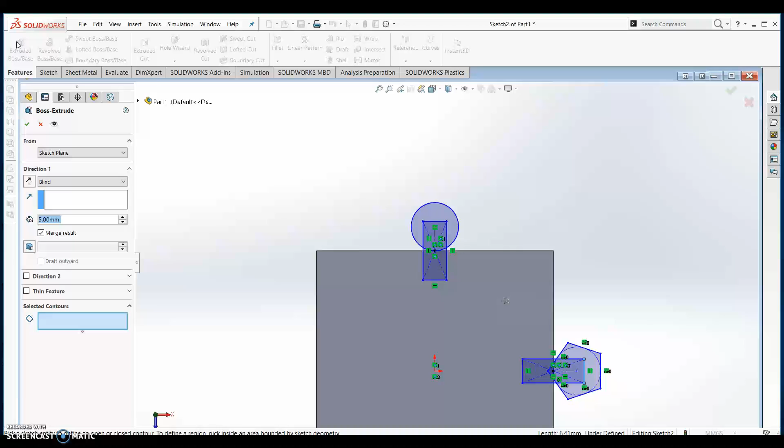With all of our shapes drawn, we are nearly ready to extrude. If we were to go directly to our Features menu and extrude at this point, we would find that each shape contained by a separate loop would need to be picked as its own entity. So it would take 4 separate sections to extrude this circle.

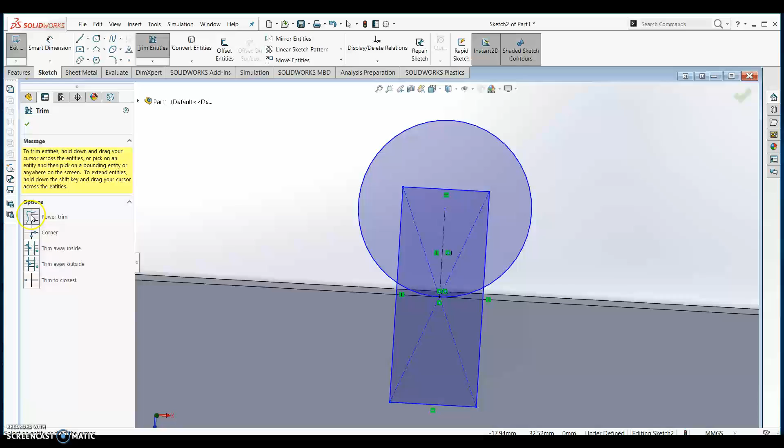We can make this much easier by returning to our Sketch tab and using the Trim Entities feature. With Power Trim selected in the menu, we can click and drag through any solid lines that we wish to delete. The lines will be deleted up until the next point that they touch.

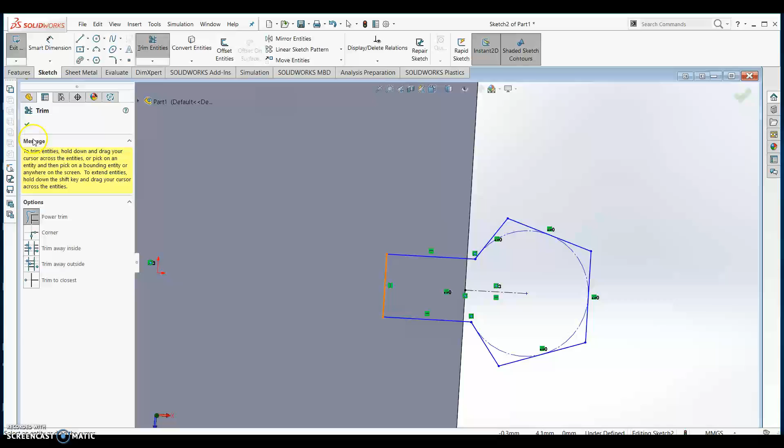We can do the same in our polygon. By deleting all of these additional lines, we will only have to click one time when extruding our features. Click the check mark to complete using the Trim tool.

Now return to the Features menu and select Extruded Boss Base. Since there are several shapes on the screen, you will find that your mouse turns each section pink as you move from place to place. We will need to click inside the segments that we want to turn into a three-dimensional object.

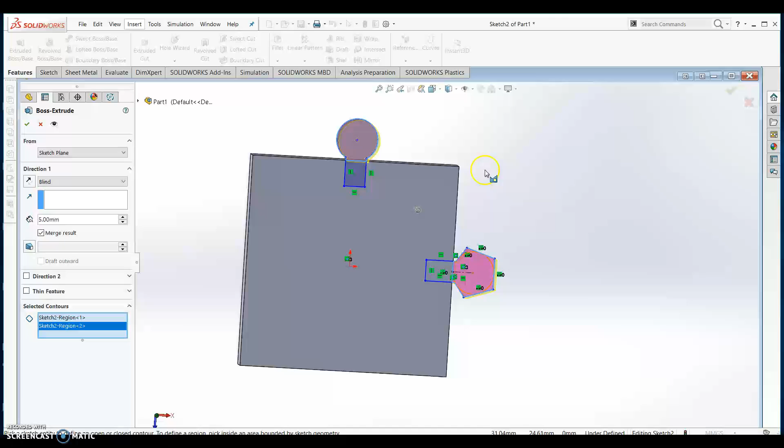We are not through yet. You will notice that the extrude is coming out the wrong direction to connect to our puzzle piece. This is a very easy fix by simply clicking the reverse direction button in our Boss Extrude menu on the left.

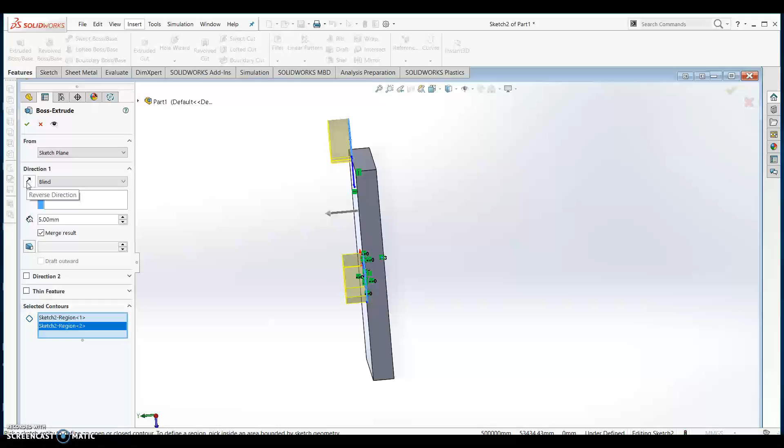Be sure that your distance is set to 5 millimeters, and click the green check mark. At this point, your puzzle piece is halfway complete.